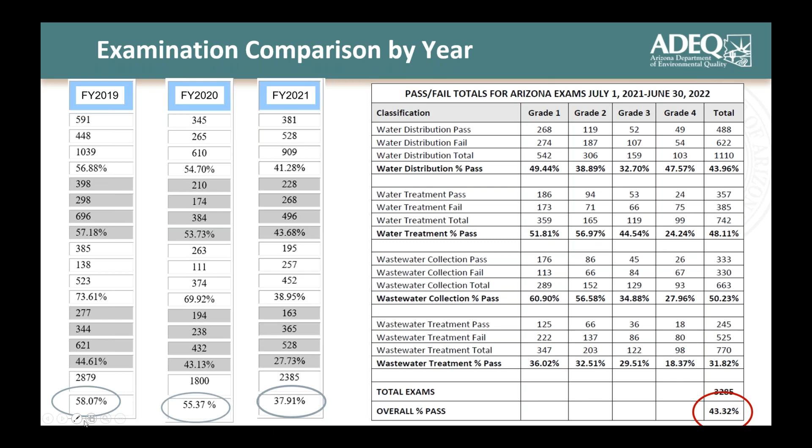Okay, so... computer's a little slow here. There we go.

This doesn't mean to apply for an early exam. Pretty much, the application provides a qualified applicant an opportunity to skip a grade they do not currently hold with ADEQ, and you can sit for the requested exams if you qualify. All applications are reviewed based on the conditions written in AAC Title 18, Chapter 5, Article 1.

Moving forward, if you hear me say R18-5, or you see this list in the presentation, just know I'm referring to this exact same rule.

In the future, if you are considering skipping a grade or going up to the next grade a bit early, we want to make sure you know your options, you know the process, and you're not going in blind. We have all this information listed on our homepage, the qualifications listed on our homepage. I pulled directly from the rule, but you can also read the rule itself on the bottom of the homepage.

There's a little bit of a typo on the homepage itself. For Grade 3, the second bullet should say 18 months of qualifying experience, not 1 year. So if I see anyone applying for a grade 3 and they fall under that, I always give them a call, let them know, hey, I see you saw the 1 year, but just so you know, the rule itself says 18 months.

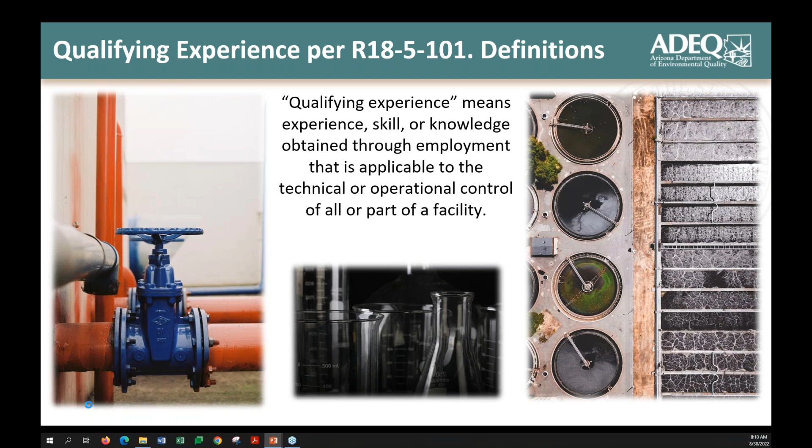Moving on to our next definition that we're going to be needing: qualifying discipline. Qualifying discipline means engineering, biology, chemistry, or closely related technical or scientific discipline. This is what your degree or your post-secondary education needs to convey for us. When you provide your transcripts, they can be unofficial, or you can also provide a diploma or picture of whatever your degree is in the STEM field. To expand on this definition, we also accept hydrology degrees, environmental science, microbiology, geology, physics. Just make sure it qualifies as a STEM degree.

For your transcripts, yes, your grades need to be a C or better. So if you don't have that, please I would hold off on applying for this, or give me a call and see what other options you have.

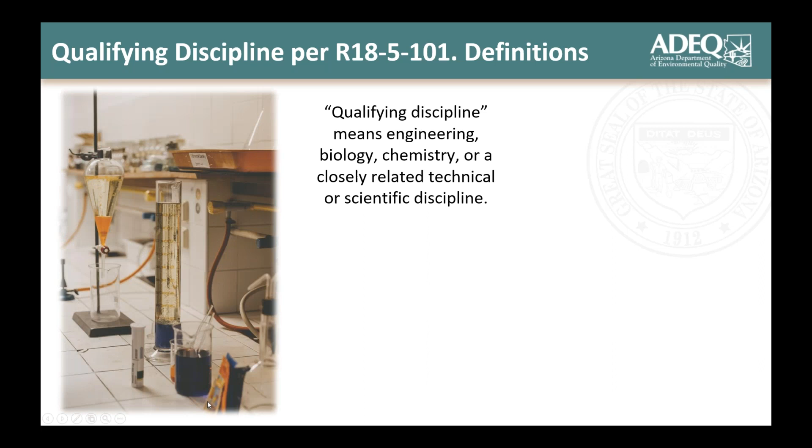This qualifying discipline will mainly fall under two subsections you'll see in a minute, while the third option is providing us a high school diploma or a GED. So we have like chemistry, we've got AutoCAD for engineers, or any system if you're familiar with the SCADA system, and then just general earth sciences — like I said, STEM degrees.

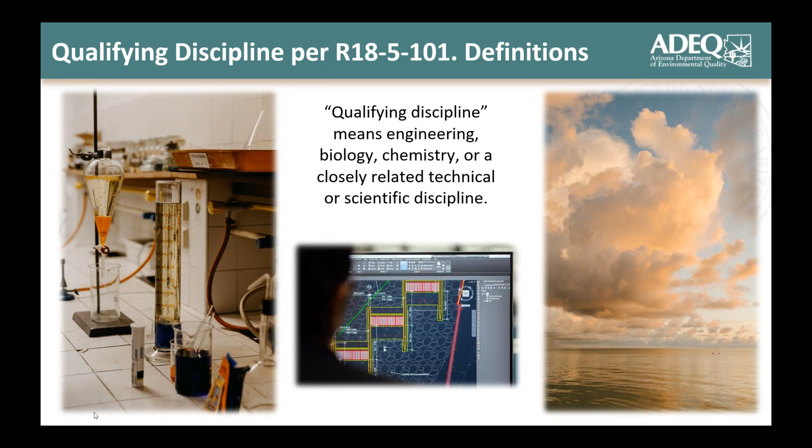So how does the qualifying experience definition and qualifying discipline definition fit into requirements per R18-5-112D specifically? Well, it's going to depend on what grade exactly you are applying for.

R18-5, section 112D eliminates the subjective decision making. We're very objective when we are reviewing your applications. Education experience must correspond with one of the three options — A, B, or C — for grade 2, grade 3, or grade 4.

I'm going to bring up some scenarios, but any person who's going for a grade 1, you don't need to apply for an early exam. Your minimum qualifications are just a high school diploma or equivalent, like a GED. Most applicants will fall under B or C. Those falling under A are typically bringing experience from another jurisdiction or have held this certification or grade in the past and it's no longer active. Okay, let's go through some scenarios.

Scenario 1: April is applying to sit for water treatment grade 2 early. Remember, we need that qualifying experience and the qualifying discipline in education. April has submitted an AA from Gateway Community College in environmental science and water resource technology, and she has been a water treatment grade 1 operator for 9 months. She could not qualify under A because she has not been a grade 1 for at least a year. But she does have an AA, and the degree itself is considered a qualifying discipline, and she's been an operator for at least 6 months. Under these circumstances, April's early exam application would be approved.

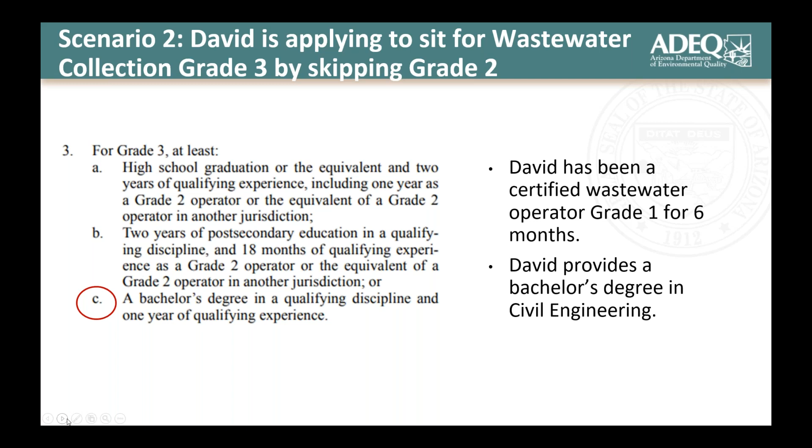Okay, and last scenario. You must get it at this point, so let's see if you can do this one along with me. If David is applying to sit for a wastewater collection grade 3 by skipping grade 2 completely, which he can do. Same scenario: he has a grade 1 for 6 months right now, and this time he's provided a bachelor's degree in civil engineering. Based off of his experience as a wastewater operator, he's only 6 months, but he has provided a bachelor's in a qualifying discipline. Unfortunately, once again, David would only fall under 3 subsection C, but his experience is missing 6 months, even though he does have the qualifying discipline. Unfortunately, once again, David would be denied the opportunity to sit early for the grade 3.

We would just recommend, hey, we recommend you sit for the grade 2. Apply again if you would like in the future, but we will talk about those options based on the certifications that he currently holds. Okay, so now that you understand how the process is, how we're reviewing your resume and transcripts for qualifying experience and education when you submit them, you're thinking in your head, okay, I know I would meet this criteria, so I'm ready to apply.

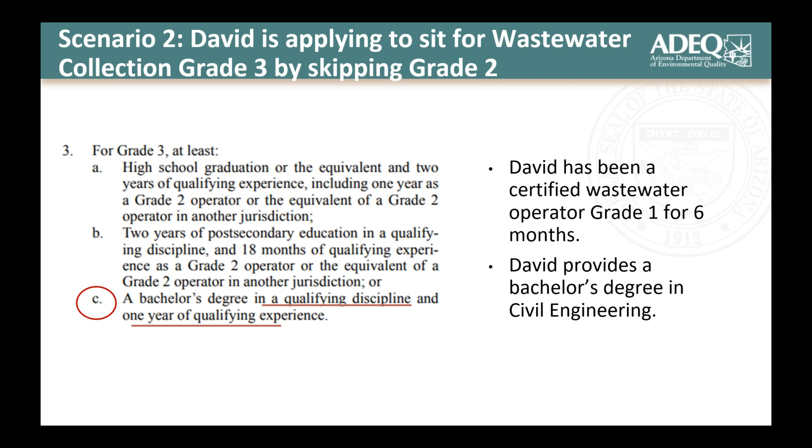Apply to test early. Please keep in mind the portal is only compatible with so many browsers, which would be Chrome, Firefox, and Safari for Mac. So to avoid any errors as you're going through your application, please ensure that you're using compatible browsers for the portal. Also, this is the operator certification portal, but moving forward, I will be referring to it as just the portal.

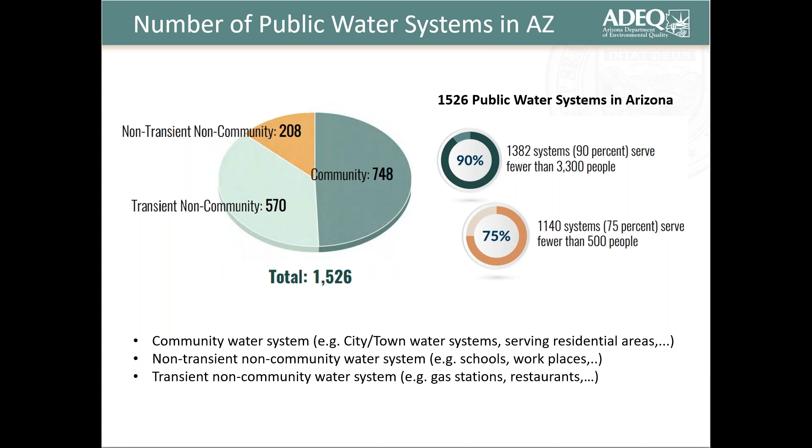Most of our systems are considered small or very small. Of the 1,526 water systems we regulate, about 90% serve less than 3,300 people, and 75% serve less than 500 people.

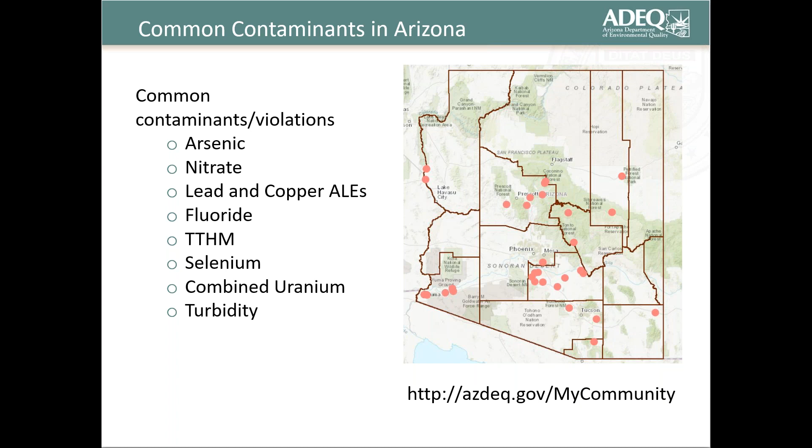The map here just shows you drinking water systems with a health-based exceedance. The most common contaminants we deal with are arsenic and nitrate exceedances for drinking water. We also see lead and copper action level exceedances, fluoride exceedances, disinfection byproducts, and so on.

Some common areas for non-compliance: the first is exceeding a health-based standard or an MCL, some caused by water system failures. We also see water systems failing to obtain required approvals from our engineering unit when constructing a new water system or making adjustments to an existing one. Anytime you make modifications to your existing water system, please let us know so we can tell you if you need approval from our engineering review unit.

Related to that, we also see the use of unapproved materials, coatings, and so on. In the field, we see issues caused by lack of preventative maintenance—leaky storage tanks and other O&M issues.

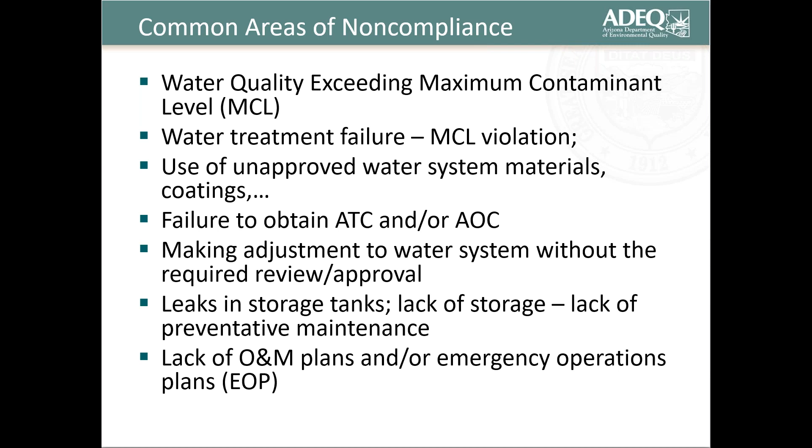In terms of paperwork, a common compliance issue is a lack of an operations and maintenance manual and a lack of an emergency operations plan. We believe most of these are tied to a lack of adequate TMF capacity—technical, managerial, and financial capacity—which brings me to our capacity development program.

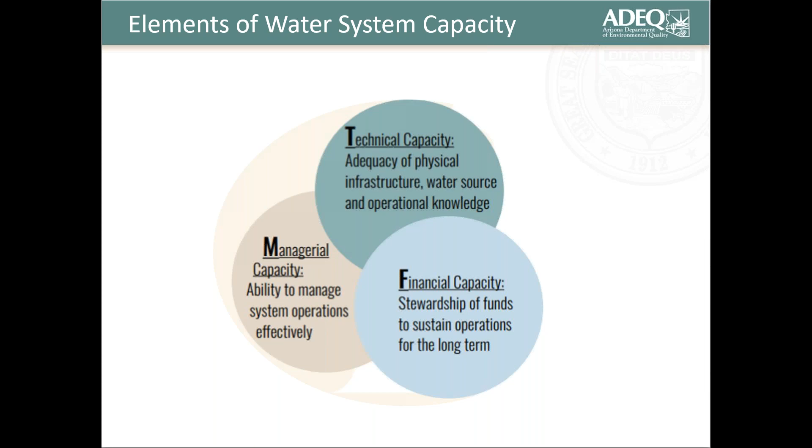Our capacity development program's goal is to strengthen the TMF capacity of public water systems so they're able to maintain compliance with all applicable state and federal regulations, and also possess long-term sustainability. Technical capacity is the physical and technical capabilities of your system—source water adequacy, infrastructure sufficiency, and the technical knowledge of your staff.

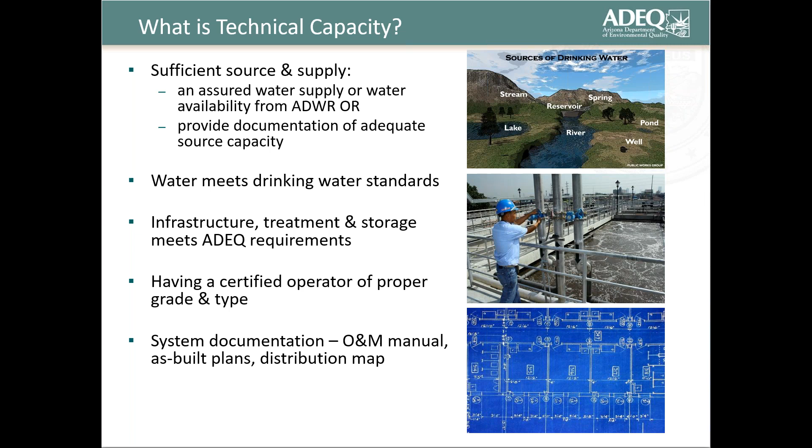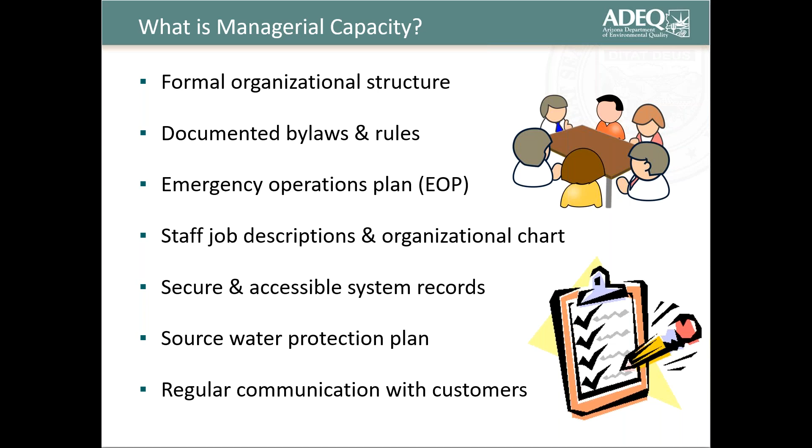Managerial capacity is the administrative and organizational structure of the system—ownership, accountability, staffing, corporate structure, which we touched upon a little, and communication. I'm simplifying these, so if you have any questions, feel free to add them to the chat.

Financial capacity would be the financial resources of the water system to maintain the system now and in the future—revenue sufficiency, are you bringing in enough revenue, credit worthiness, and what kind of fiscal controls do you have?

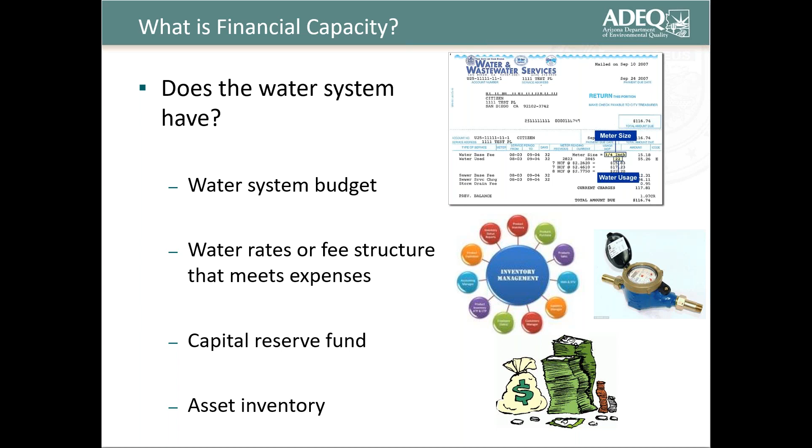So your annual budgets and so on.

So why is TMF capacity important? Like I mentioned before, it's so public water systems are able to meet current and future demand and also maintain compliance with all regulations, state and federal, long term. EPA also requires states to develop a capacity development strategy and programs to help public water systems strengthen their TMF capacity. We just revised our strategy in 2022. The strategy is basically programs, methods, and tools that ADEQ will implement so that new and existing water systems have adequate TMF capacity. We list out what kind of tools, programs, and projects we're taking on so we can help you guys maintain adequate capacity.

One of our goals for fiscal year 2022 was to evaluate the overall health of our public water systems. So to do that, we developed a TMF assessment tool, and the data we gather is going to help us understand the capacity needs within the state. We have conducted the assessment of 1,427 systems so far, so we only have less than 100 systems left. We're hoping to use that data to come up with projects that would be useful to public water systems.

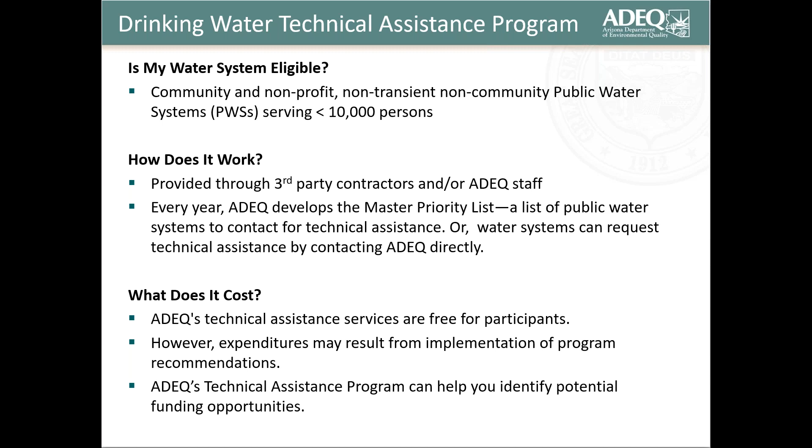To explain more about the type of technical assistance we provide, we can assist with system evaluation with recommendations for improvements. Usually it's one of our contractors that will come to your system, do a full-on evaluation to let you know where you have capacity gaps and provide you with recommendations to improve, and also some of the basic costs to do that. So you can use that to go to funders and so on.

Another type of technical assistance we provide is treatment selection and design. So if you're exceeding for a particular contaminant, we can help you select the type of treatment that would be optimal for your system and also help you design it. For systems that have treatment, we can assist with treatment optimization or operations optimization as well.

We assist with management and financial planning. This would include budget preparations, rate analysis if you need that, board training, asset management plans, and so on. That's under management and financial planning. We can also help you prepare permitting documentation, assistance with putting together an approval to construct and approval of construction.

We also assist systems with planning for consolidation or regionalization. Most of the time, the consolidation projects that we worked on are usually smaller systems that are dealing with some sort of contaminant or that have an MCL exceedance, and they don't have the capacity to maintain a water system. For example, it can be a school, so it's really not their main job. They want to consolidate with the nearest town or city, so we can assist with those type of projects as well. And like I mentioned before, we can assist with identifying and seeking funding for needed improvements.

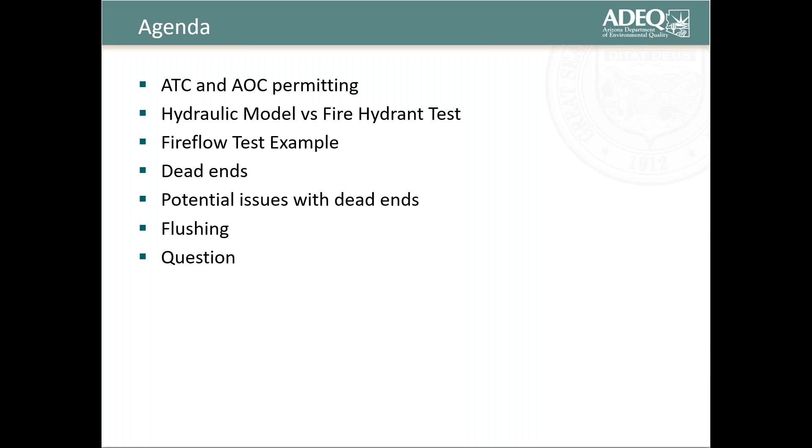So here's the agenda for my presentation, it's going to take about 25 minutes. First, I'm going to talk about what an ATC AOC permit is and how it's related to fire flow and flushing. Then we'll move over to talk a little bit about hydraulic model and a fire hydrant test. We'll go over a fire flow test example. Then we'll move on to talk about dead ends, potential issues with dead ends, flushing, and then we'll have about 5 minutes for questions.

Okay, so ATC stands for Approval to Construct. A public water system needs to submit an ATC application before constructing any water components. So the most common components are listed there: wells, storage tanks, booster pumps, water line, treatment plant, and chlorinators. So the ATC permit will allow the water system to construct these water components.

ADEQ usually does a review and will check to make sure that the proposed equipment is designed correctly. After construction and testing, the water system now will have to apply for an AOC, that's approval of construction permit. The AOC permit is for the water system to gain permission to operate that equipment.

Usually the ATC and AOC applications are submitted by a professional engineer that works for the water system or is hired by the water system. Usually we work with the engineers since they have to provide their PE stamp for the design report and construction drawings, but we definitely like operator participation and input since they know the system the best, and some of these engineers are just contractors, or they'll gain information just on a site visit or whatnot.

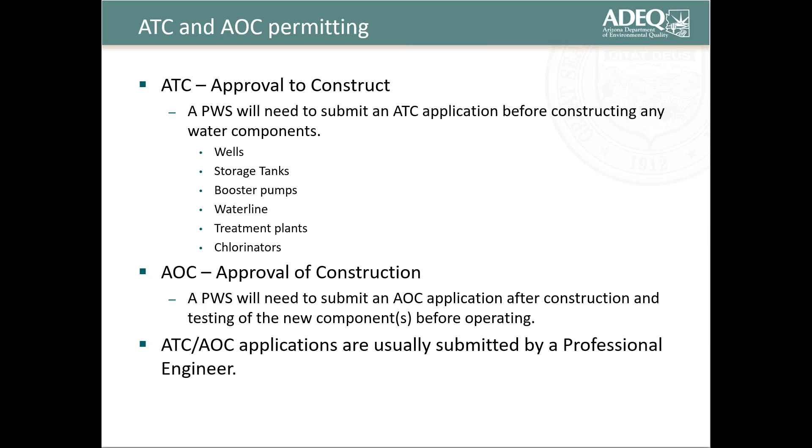So the reason why we're talking about permits is we run into fire flow issues with water line permits. So we do need an ATC permit for a new water line, whether that's an extension or modification or for a new subdivision. So I have up there that if the water line project costs more than $50,000, an ATC application is required.

The $50,000 limit is for an exemption. So if your project is a water line and it's under $50,000, you may be up for an exemption. We're not going to talk about that today, but if you have any questions on that, I can answer that at the end. So as part of the ATC application for a water line, the applicant will need to submit construction drawings stamped by a professional engineer, the review fee, and a design report stamped by a professional engineer.

And some details in the design report, it covers information on the summary of the water line project, any calculations that needs to go along with it. And the big one is justification to meet the minimum pressure of 20 PSI for all flow conditions. So for example, if we have a new subdivision going in, the design report will calculate how much water is going to be used in that subdivision and how the existing water system can meet that demand and pressure.

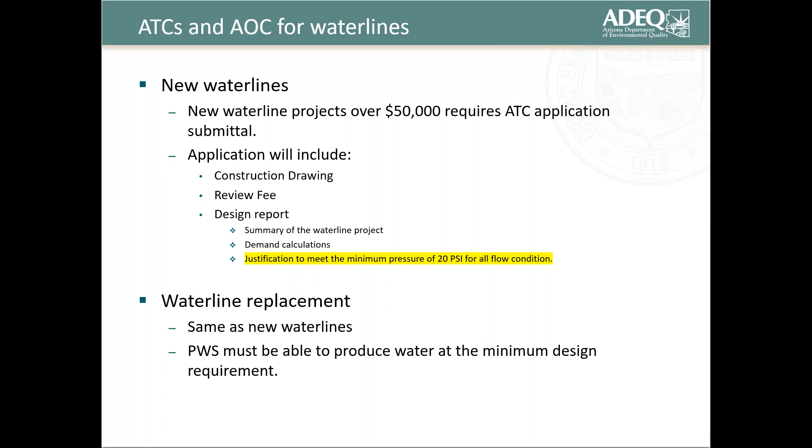Okay, so we're gonna jump over to hydraulic modeling and fire hydrant tests. These are two of the options to provide justification to show that your water system or new water line project can meet the minimum pressure of 20 psi for all flow conditions.

We like to see that the water system can demonstrate their worst case scenario, and that is usually fire flow plus max demand. So usually for a new subdivision, hydraulic modeling is the best option.

You'll see it in the design report. The engineering will develop a model to show the average flow, max flow, and fire flow, using existing flow data to conduct their model. This helps them design what size line is needed for the subdivision, how to loop the system if necessary, and what the pressures are going to be.

For example, if you're in a hilly area, the hydraulic model can determine if you need to put in pressure reducing valves, a new booster station, etc.

A fire hydrant test is commonly seen for water line replacement projects, especially if you're just replacing a small segment. Hydraulic modeling can be expensive, so you can use fire hydrant tests along with some calculations to show that you're able to meet the minimum pressure of 20 psi. Usually the hydraulic model will use a fire hydrant flow test in order to calibrate their model.

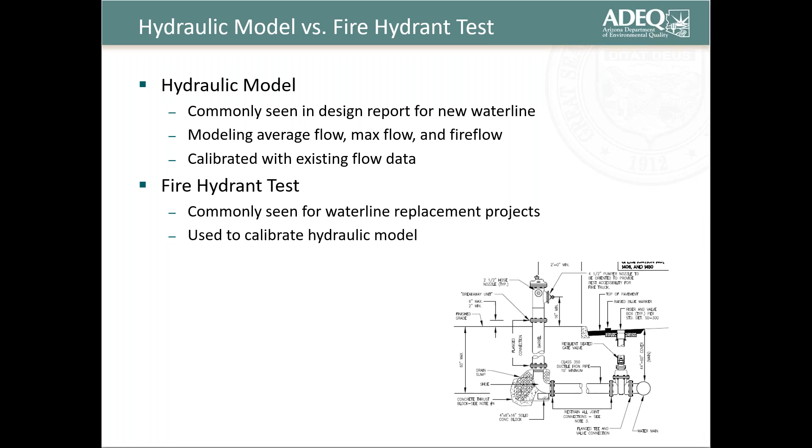So here is a kind of made up subdivision, pulled from one of our examples. We have this new subdivision here on the left, a proposed subdivision basically, and then this existing water line along this road. So C here is going to be our control fire hydrant, and then 1 here is going to be where we're testing the fire flow.

During a normal fire hydrant test, the operator, water system, or fire department will come out and run the fire hydrant. They'll measure the static pressure at the control hydrant, basically the pressure at which there's no flow, and record that. Then they'll run the fire hydrant downstream and measure the flow of this hydrant. They'll have someone on the other end measure the residual pressure, and from that we can calculate our worst case scenario.

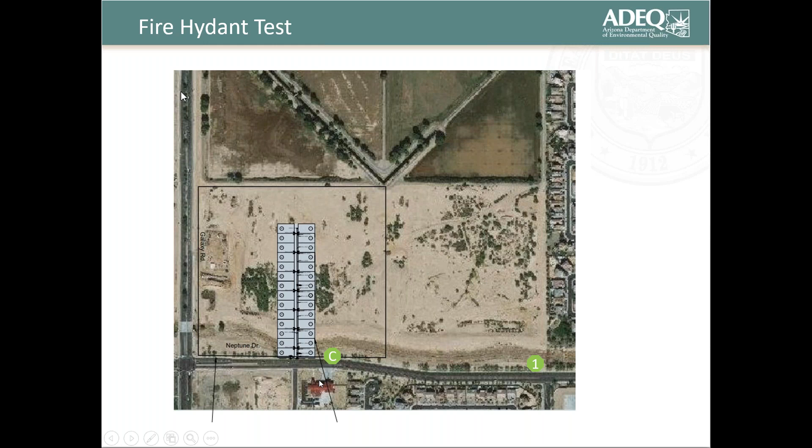Let me show you here. This is typically what it looks like for a fire flow analysis. If you look here at fire hydrant 1, that's what we're talking about, it has some information on the hydrant, and then here's the control hydrant.

First we'll look at the static pressure, what we talked about. Remember, this is when they pull the pressure without any demand. So our scenario here, we have a 73 psi pressure with no fire flow.

The next step is they're going to run that hydrant 1. That hydrant is producing 1,200 gallons a minute, and at the control hydrant, now we're getting a pressure of 66 psi. Of course the pressure is going to fall when you have a high flow. This made up system is designed really well, so the pressure didn't drop that much, but if your system is small or you don't have that much pressure, it could be a significant drop.

The last step of the hydrant test is a calculation. They extrapolate the pressure down to 20 psi to see how many gallons per minute can be produced if the pressure was reduced to 20 psi. In this case, you can pump up to 3,500 gallons a minute and still have a pressure over 20 psi.

Now, sometimes these cases are realistic, and sometimes they're just a calculation that gives you an estimate of how strong your system is. The reason we have this case is sometimes the fire department can hook up to the hydrant with their own pump in their fire truck. So if they know the system is well pressurized and they need extra water, they can pull more water from the system instead of just getting what naturally flows. But 99% of the time, this isn't going to happen.

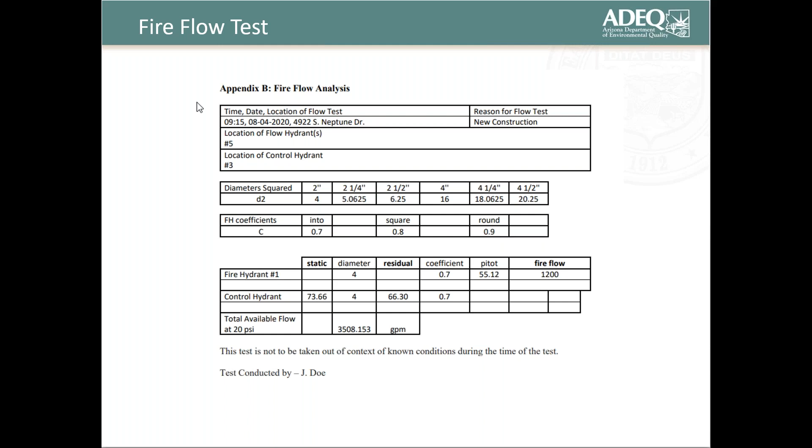Any questions on that? I know it's kind of covered a lot right there. No questions so far. All right, thank you.

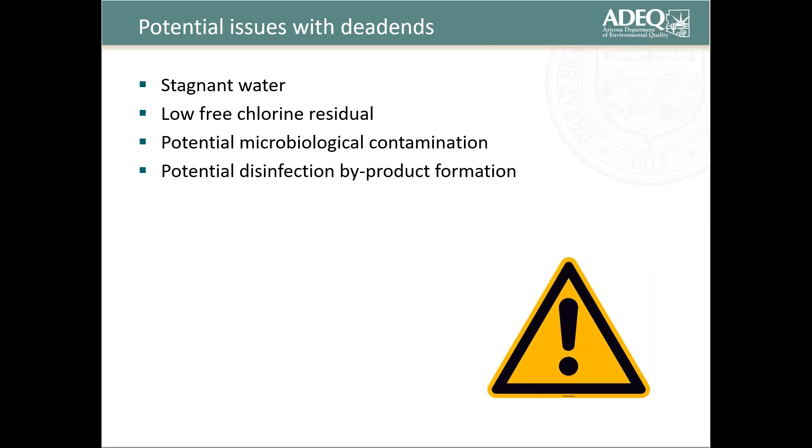It's not required, there's not a requirement for not designing it like this. We just ask you to show us the preventative, proactive measures on how not to have stagnant water. But then it's up to the water system to properly design their system. In some scenarios you don't have land or the financials to loop the system, so we'll work with you to mitigate the issue as much as possible.

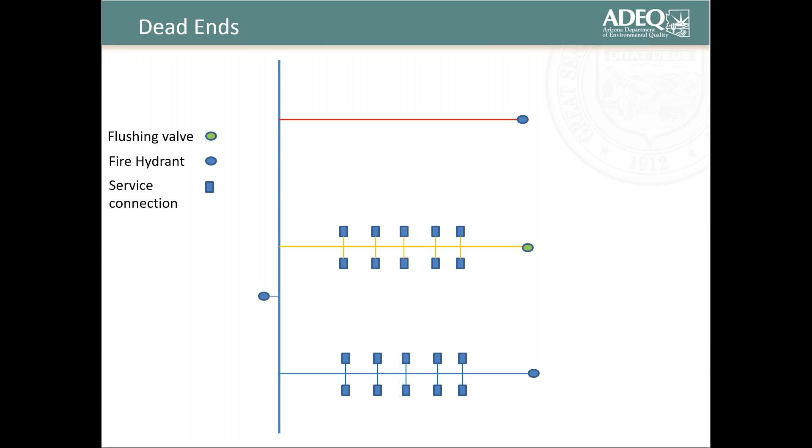A lot of this has to do with the engineers and water system, but operators are the ones out there. They know how the system works, so we definitely love their input to get more realistic information rather than just calculations and models. So, all right, that's all I have.

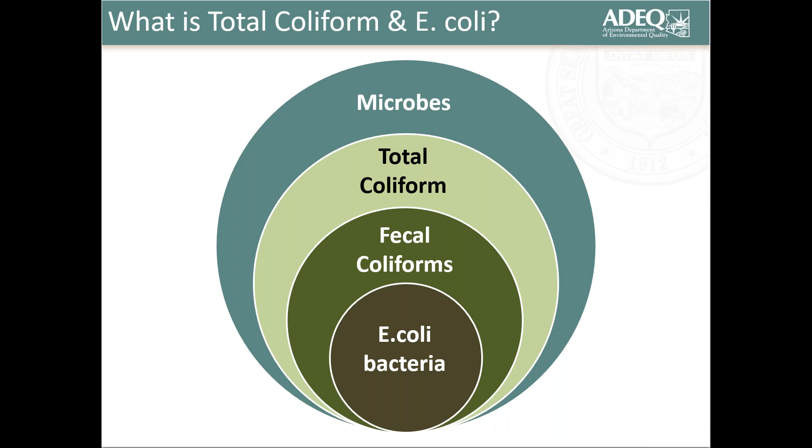So, some terminology. You turn in your samples to the lab, you request some BACT results. We use TC positive as an acronym for total coliform positive, meaning that it is present. TC negative means total coliform is negative, meaning there are no total coliforms in that sample. Then you have E. coli positive, obviously present, and E. coli negative, absent. So in a perfect day, we want to see negatives and negatives across the board.

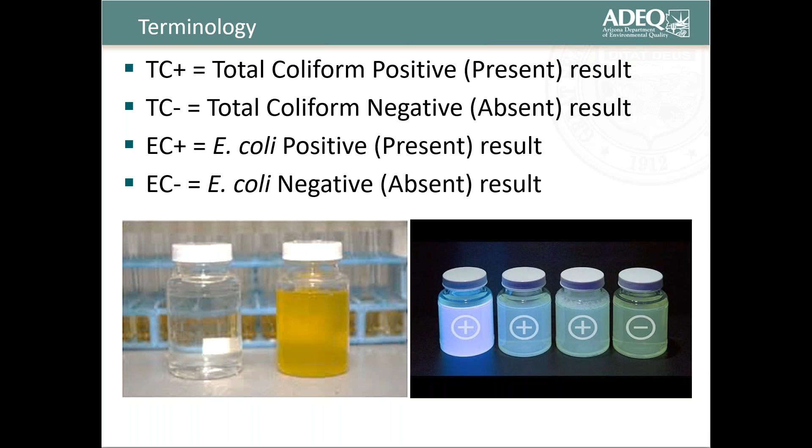So I have a couple of frequently asked questions that we get, and I'm going to walk us through them. One of the first ones we often get is, when are my BACT results due?

Like most of the samples that you send in for analysis, they're all due - the data need to be received on the 10th day after the monitoring period ends. All your samples need to come from your MSSP. It has to be pre-approved by your regulating agency, whether it's ADEQ or Maricopa, or if you just fall under the ADEQ umbrella.

If you want it to count for compliance, you can't just go take your BACT samples from any sample tap. It has to be specifically written out in your MSSP and approved prior to taking the sample. So if you have an MSSP that is out of date, or you want to add some additional sites to it, now is the perfect time to update that and get it sent over to your regulating agency.

So we said the 10th day after the monitoring period ends - any data received after this date will be considered late data, and the system will be given a reporting violation. I want you to keep this in mind. We'll revisit this idea a little bit later, but ultimately it's up to the water system to get that result to your regulating agency in that time.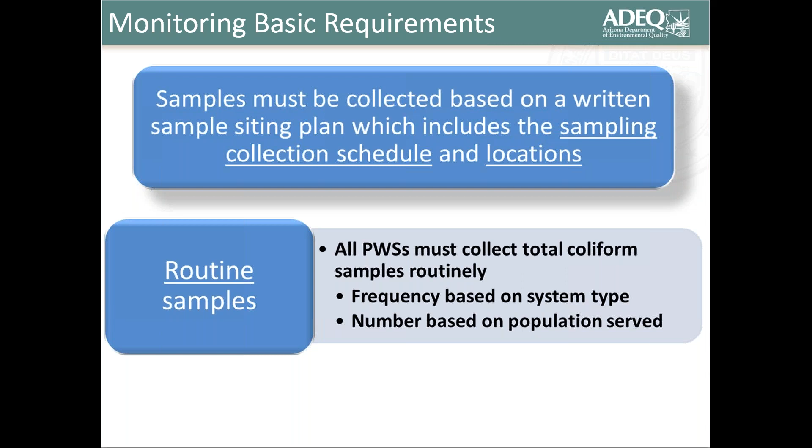Total coliform positive and E. coli positive results are due within 24 hours of notification of the results from the lab. Again, we'll discuss that a little bit more in detail in a second.

So I am a water system, I have a total coliform or maybe an E. coli positive. What do I do? Well first, you want to make sure you contact your delegated regulatory agency, and you want to do this by the end of the day. If this is after business hours that you received this, please leave a voicemail, send an email, do both of them, and then follow up the very next business day with us. It is imperative that this information is conveyed to the regulatory agency in a very timely fashion.

Again, we talked about this earlier with E. coli - this is something that can get somebody sick very, very quickly, and this can be life-threatening. So it's imperative that this be done in a very timely manner.

What do you do next? Well, take your repeats. So you have a positive, you have sent in your MSSP, you have it approved. Take your repeat samples - they're always going to be upstream, downstream, and the original location that your sample came back positive. And then you need to take any raw water samples at any of the wells that were active and contributing to the finished water at the time of this positive result.

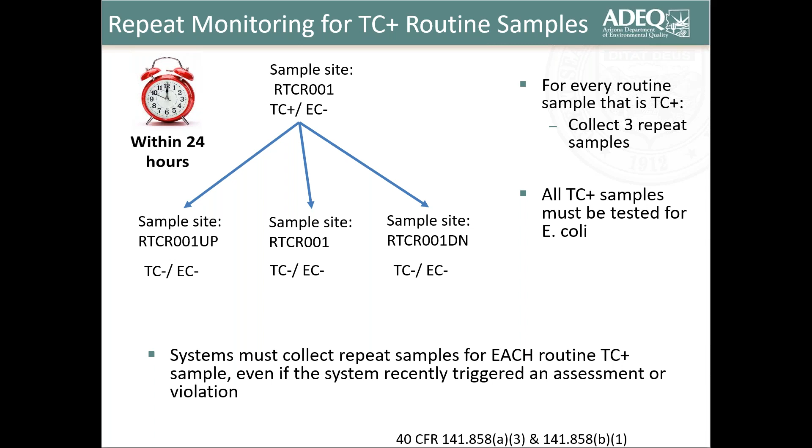So after you got your results off of your repeats, you took your groundwater samples, the next step is that you need to determine if you actually triggered a boil water advisory, if you triggered an assessment, or if you get an all clear.

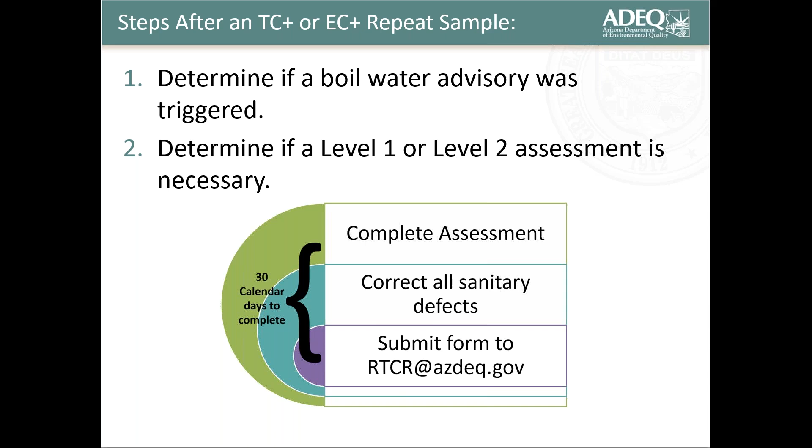Assessments are due 30 calendar days from the second that you are notified of the repeat sample positives.

I said we'd revisit this. This is a question that we often get: is it 24 hours from when the lab calls or emails the notification to the public water system, or is it 24 hours from when the public water system hears the voicemail or opens their email, so when they view it?

This is a very interesting question. To answer this bluntly, it's 24 hours from the lab notification. So you need to take your repeat and any of the groundwater samples within 24 hours of the notification from the lab about the total coliform positive or E. coli positive.

Some people ask, well, how does ADEQ or the agency know when the lab notified me? Well, on the DWAR form, there is a space that the lab is required to fill out in the event that they get a total coliform positive or an E. coli positive. I'll talk a little more about how you can avoid checking your emails and voicemails over the weekends or holidays, but the lab does display exactly when the water system was notified, and that's when the clock starts.

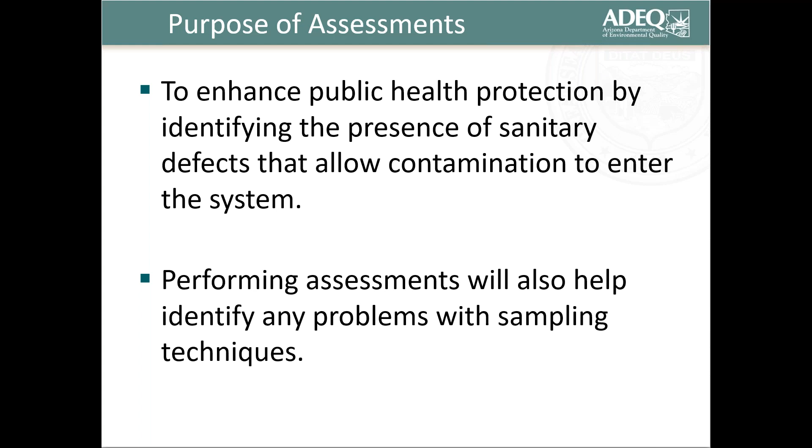So what is it that triggers a level 1 assessment? For very small systems, which is a majority of the systems in the state, if you take less than 40 routine samples per month and you get more than one total coliform positive—so that would be your total coliform positive and then your repeat—that triggers it. For much larger systems, if you take 40 or more samples per month, the threshold is 5% of the total samples have to be total coliform positive in order to trigger an assessment.

You can also trigger an assessment if the system does not take all of the required repeats. This includes your groundwater or any of your upstream, downstream samples. If you take them at the wrong location, they're not included on your MSSP. And finally, if you don't take your repeats within 24 hours of the lab notification—remember, we've got to take our repeats within 24 hours—if you don't do that, it automatically triggers a level 1 assessment.

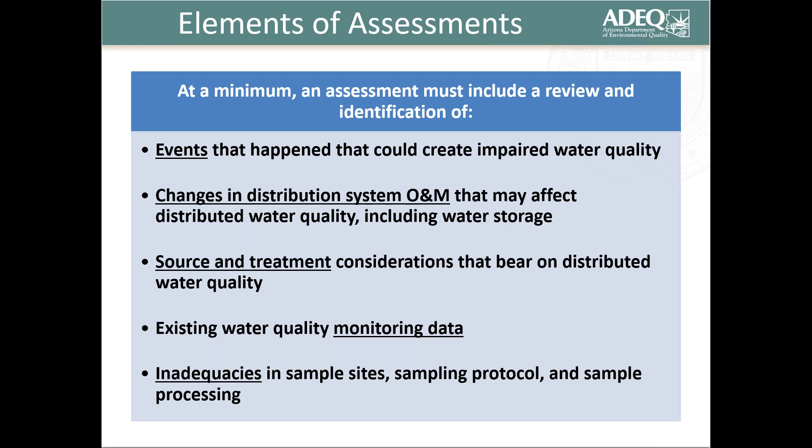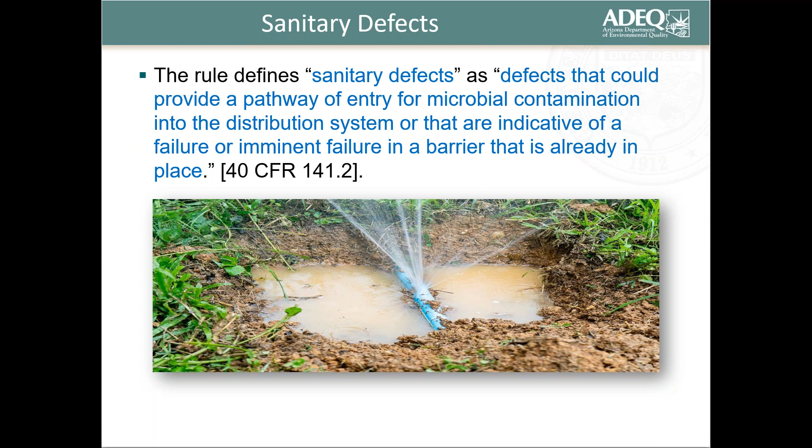So I have some examples of sanitary defects. Sanitary defects can vary, but some examples are storage issues, like plant or animal activity, improper sealing of your storage tanks. This is a good picture showing a leaky storage tank that has plant organic matter growing out of the side of it, and that is just a pathway for contamination to get into the system for finished water.

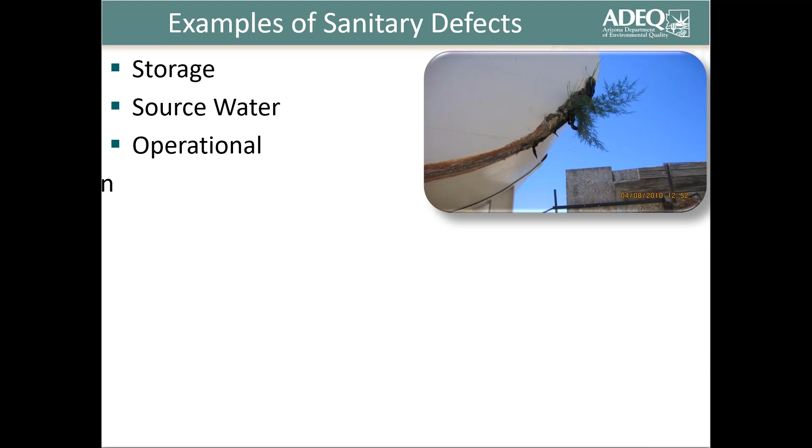Other things that could be sanitary defects - you could have operational issues, maybe an untrained sampler. Some of us know how simple it is to contaminate a BACT sample if you aren't extremely careful, taking that sample and following the protocol to a T. Another thing is failure to follow your sample siting plan. The system could also be doing inadequate disinfection practices.

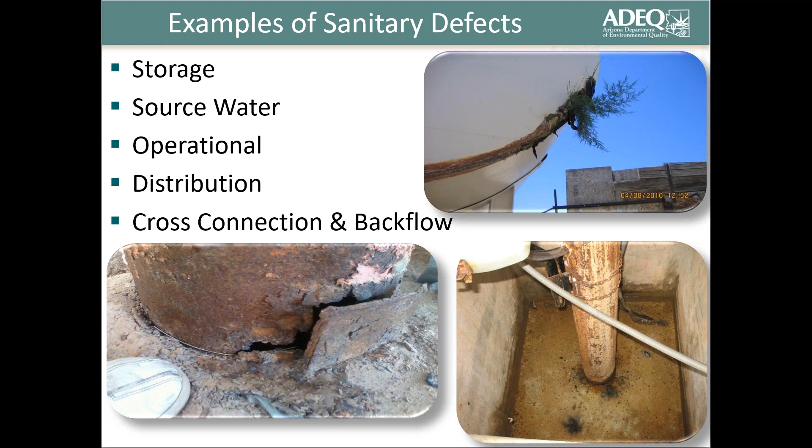So what steps need to be taken during a boil water situation? Nobody ever wants to be in this situation. It's always kind of a chip on our shoulder if we have to put out a boil water advisory.

It's not something that any of us really want to go through, but it's important. This is a very high priority because people can get sick and ill very, very rapidly. So it's best to be prepared and understand what results can actually trigger a boil water advisory and what you need to do in that event.

So we'll go through that. It's kind of a pop quiz. Obviously, I can't hear anybody, but I'll give you a second to think about this. Which of these three results would trigger a boil water advisory?

Is it A? If you have a routine sample that is total coliform positive and E. coli negative, and one of the repeats are total coliform positive and E. coli negative, does that trigger a boil water advisory? If you have a routine sample that is total coliform positive, E. coli negative, and one of the repeats are actually missing from the set, does that mean you have to do a boil water advisory?

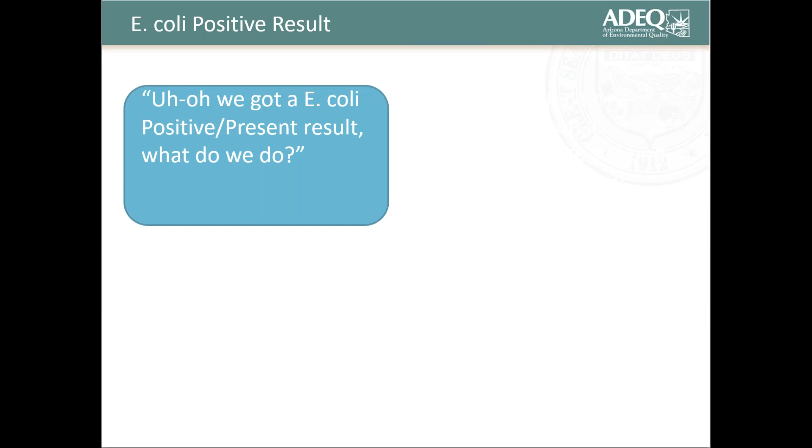So, I have triggered, I've got an E. coli positive. It's positive, it's present, it's there in my results. So what do I do next?

So you determine that the system has triggered your boil water advisory. Call us, call your delegated agency, call your compliance assistance coordinator. Like I said before, email them, call them. If they don't answer, leave a voicemail. If you don't hear from them, call them back the next business day. This needs to occur by the end of the day, even if it's on a weekend or a holiday.

But we all know how to avoid those now, so we're not going to be doing those. But again, if we don't pick up, leave the voicemail. The big takeaway message from this is act now. Don't wait. This is an acute contaminant. Remember, people can get sick very, very rapidly with this, so we cannot wait. This needs to be done as soon as humanly possible.

So Tier 1 public notice is required. You'll need to fill out a Tier 1 public notice and distribute it within 24 hours of notification from your results from the lab. We can provide you with the template for your boil water advisory, but be sure to get ADEQ or your delegated agency's approval of your public notice before distribution. Our approval time is cut pretty short, we're trying to get these back to you within 2 hours. That's our goal, but we want to see it before it gets distributed.

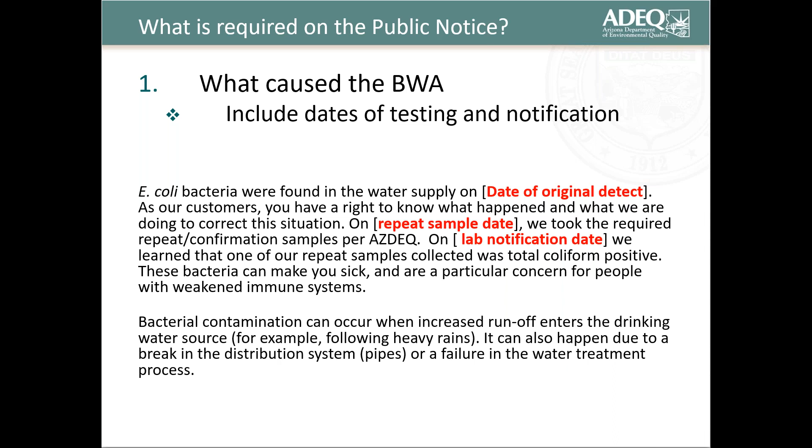So there's a couple of things required in the public notice. There's mandatory language which has to be present. Don't worry, I'm not going to read this slide to you, but you will need to include the things in red, like what caused the boil water advisory, what are the significant dates, like the date of the routine or the repeat sample, the date of the lab notification. These are all important things that have to be included in the boil water advisory.

There's more mandatory language. What should the customers do? They need to know if there's going to be an alternative source of water provided by the system. Is bottled water going to be available?

This is information that needs to be conveyed to the customers. You need to specifically say what fecal coliforms are, where they are found, what risks are associated with drinking contaminated water, and what symptoms could be present if the water is consumed. Those are the things, those wonderful descriptions that I gave at the beginning of the presentation.

You also need to include the corrective action. What's the corrective action that the system is actually taking, and how long is it estimated to take? What are you guys doing? Disinfection? Is there a repair that needs to occur? Maybe there's a, et cetera, et cetera.

But please try to be as specific as possible, especially with the dates and the time frames. If you can, be down to the minute, by Wednesday at 5 p.m. we plan to have this resolved.

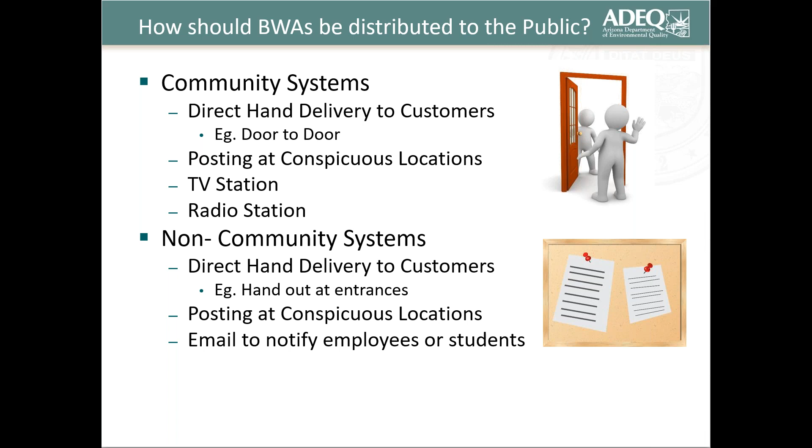So once the public notice or the boil water advisory has been distributed, you'll need to submit the final version to us along with a completed certificate of public notice distribution. Then start your level 2 assessment to identify any issues, like a cracked well casing, or animal feces in the well or the well house, or backflow issues. Just remember that the level 2 assessment must be performed by an operator of the same grade or higher as the public water system.

Make sure that ADEQ or your delegated agency has all the necessary DWAR forms for your routine repeat groundwater samples. If you don't have an MSSP, make one, and submit one with your assessment. If you have one but need to make changes, do so at that time. You can contact your compliance assistance coordinator for approval.

Perform any of the necessary corrective actions, like fixing a leaky tank or disinfecting a well house, and then let your regulatory agency know what's going on. Open lines of communication, please. All of the CACs, all the compliance assistance coordinators, are here to help and answer any questions that you might have. At the end of this presentation, I'll give you a list of the most updated assignments.

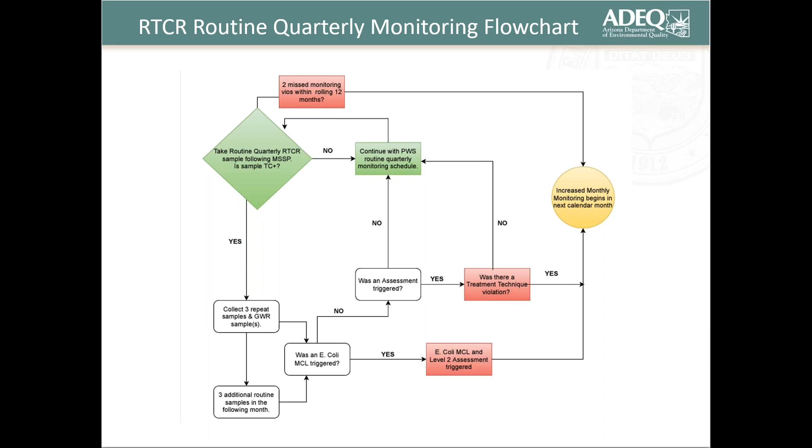All right, so I got a pop quiz, last question. True or false? A routine sample is total coliform positive, E. coli negative, and one of the repeats is total coliform positive and E. coli negative. This system is on quarterly monitoring, so that means this system will have to return to monthly monitoring the following month. Is that true or false?

Well, it's false. Remember, the things that can push the system back on monthly monitoring are: a Level 2 assessment is triggered, an E. coli violation, an RTCR treatment technique violation, a missed late assessment, a missed late seasonal startup form, or 2 RTCR mismonitoring violations in a rolling 12-month period.

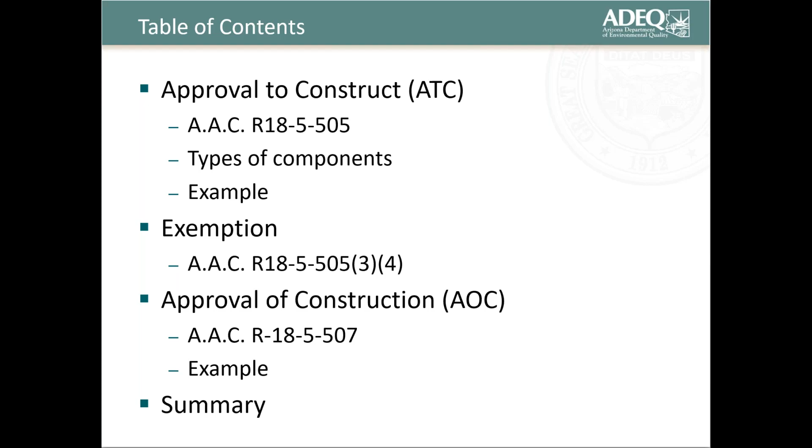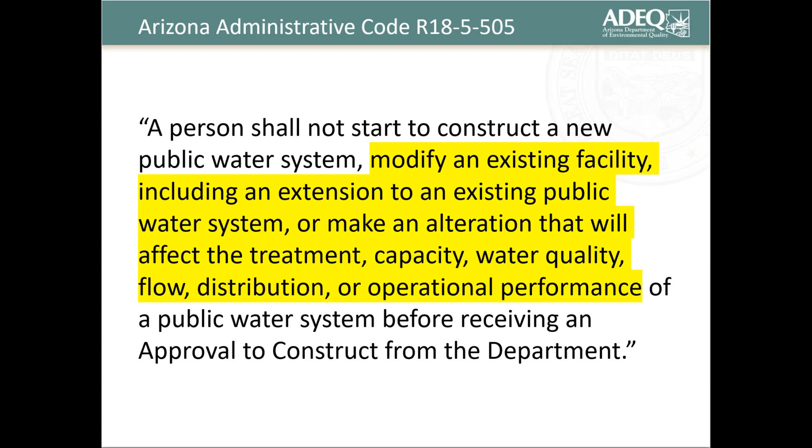Continuing on with R18-5-505, a complete ATC application includes the completed ATC application, the design report, and analysis of a proposed new source of water - this is specific to the type of water component, most likely a well - and then other pertinent data required to issue the approval to construct.

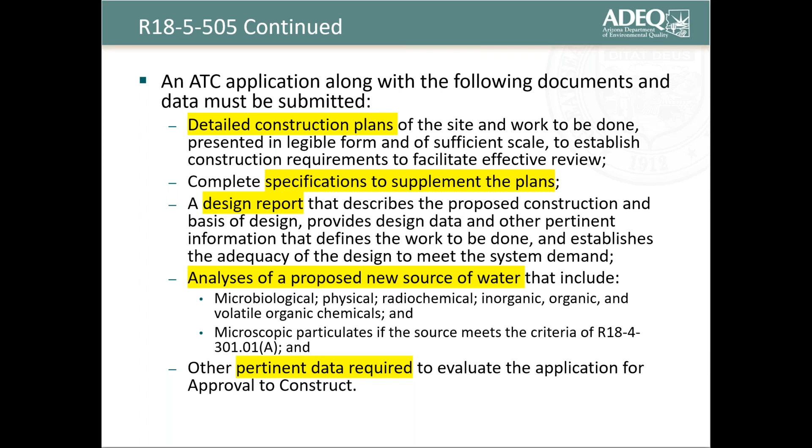So furthermore, proper verification of the document should be provided. The ATC application only requires the applicant and applicant's agent signature, which is usually the consultant or engineer. The construction plans and design report require the professional engineer's seal and signature on the cover page. The seal must include the signature and date signed, and the seal must be on each sheet of the construction plans.

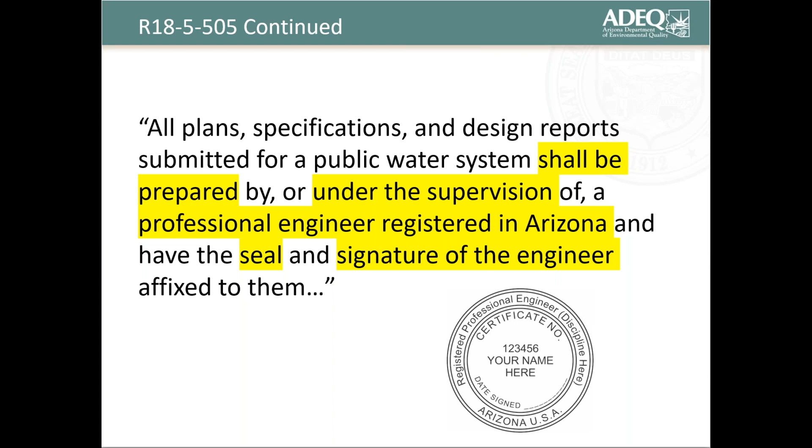So basically, to sum up the needed documents: the primary documents needed are a complete ATC application, the design report, the construction plans stamped by a professional engineer, and the review fee. The review fee varies based on the component type, but when an ATC application is submitted, we double check to make sure the appropriate fee is calculated before sending an invoice. There is a section in the ATC application to get an estimate of the total review fee, but we make sure to double check so we're not overcharging or undercharging an application.

So a water service agreement is needed for construction of subdivisions. This form is an agreement between the consultant and the public water system to allow use of water. However, this does not only apply to subdivisions, it also applies to other water components. So ADEQ requires some form of a letter from the public water system, but if the public water system is the applicant, then the water service agreement is not needed.

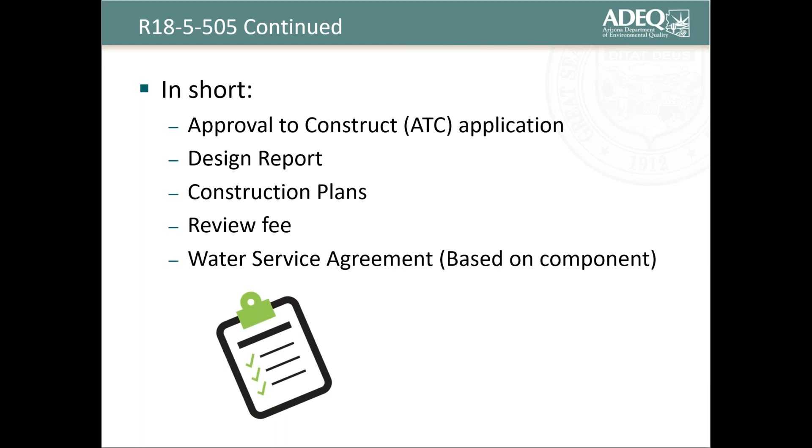So now we'll go over the different types of water facilities that need an ATC permit.

So these are the facilities that require an ATC permit: the water line, well, storage tank, water treatment such as chlorinators, blending, UV, GAC, booster pumps, and hydropneumatic tanks or pressure tanks.

Each facility is reviewed according to the type of function it serves in the public water system. As an engineer reviewer, we follow the guidelines and rules set forth in Engineering Bulletin number 8 and 10, the Arizona Administrative Code, the American Water Works Association, and local standards set by the county.

Next we'll jump into what is needed for each water component to obtain an ATC permit. Here are the documents needed for a waterline ATC approval. As always, we'll need that ATC application.

Specific to the waterline approval, there's a section 8C that needs to be completely filled out that has all the flow, demands, and pressure for that project. Then the design report, so the hydraulic analysis or the model, the calibration method, the construction plan, and the water service agreement, which must be filled out if the applicant is not the public water system owner.

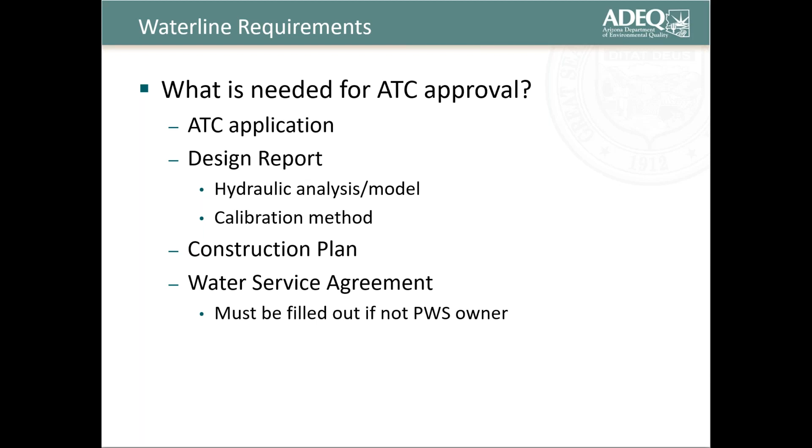So for well requirements, these are the items that are needed: of course the ATC application, and then in the design report for a well, the pump curve, then the construction plan, we need the plan and profile view of the wellhead, and then a new source analysis.

It must be completely filled out and signed by the laboratory. There is an option on the ATC application to submit it with the ATC, or you can submit it with the AOC.

Now, the only potential risk that we'll run into if you decide on submitting that new source analysis with the AOC is that the water source is unknown, so there might be potential for MCLs, and then we'll have to halt that well ATC and make sure that we address that MCL and get the appropriate treatment.

Some common deficiencies that we find in well reviews are missing analysis of the pump curve, missing that plan or profile view of the wellhead, or missing component details such as shut-off valves, pressure release valves. The new source analysis is incomplete or more than a year old, so that will require resampling for total coliform, nitrite, and nitrate.

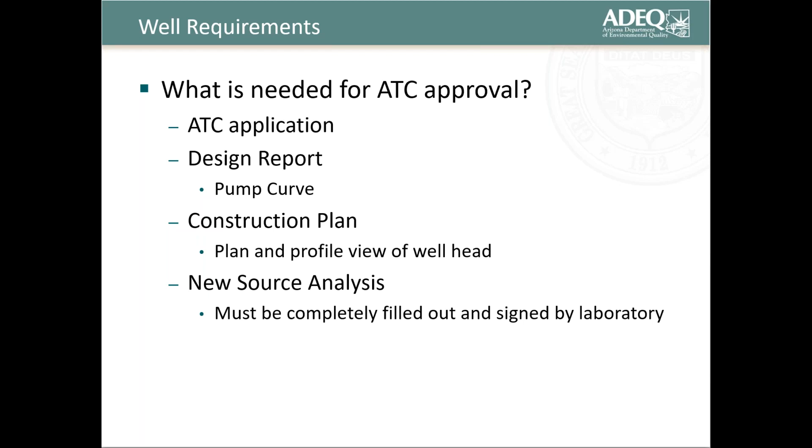And for the storage tank ATC approval, again, the ATC application, and there is a section specific for each component. The design report, we look for the storage capacity calculations and the specifications of the tank. And then on the construction plan, of course, the plan and profile view with all the details related to the storage tank.

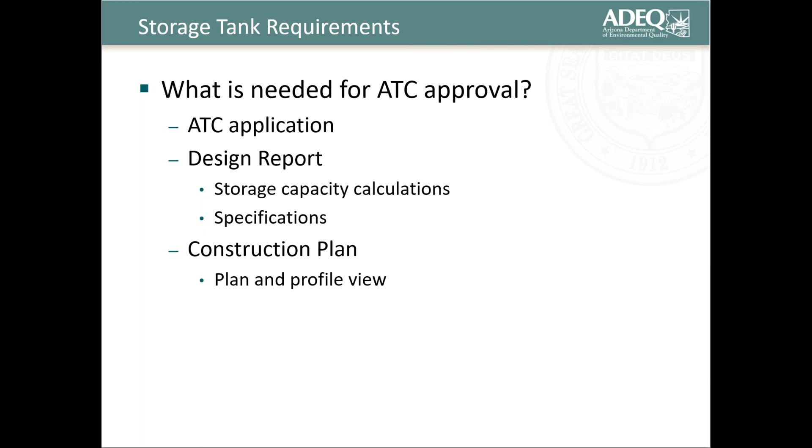Common deficiencies for the storage tanks are missing specifications, so missing the tank details and dimensions, missing the plan or profile view, along with some components that aren't always recorded on the construction plan, such as the overflow drain, sampling tap at the discharge of the storage tank.

Now, going on to the water treatment ATC requirements, again, the ATC application, and there is a specific section for treatment. It is important to note that each treatment type may require more data or information than others, so usually the more documentation and details, the better.

So for the design report, we look for the specifications of the treatment/disinfection component, the water quality analysis, and then again on construction plan, as much detail that can be provided, the better, so the plan and profile view of the treatment.

Common deficiencies that we find in treatment review is just missing those specifications of the treatment type, no water quality analysis before and after treatment installation. We like to see that just to make sure that it's being designed appropriately.

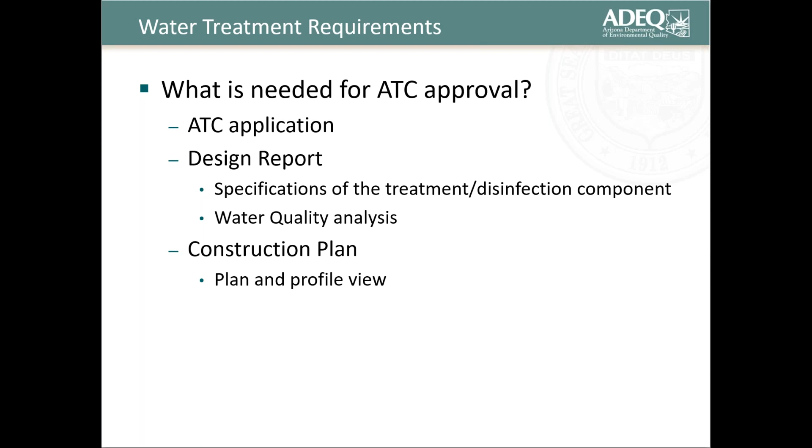And for booster pumps and hydro tank requirements, again, ATC application needs to be completely filled out. The design report, we look for the pump curve of the booster pump and the specifications. And in construction plans, we look for that plan and profile view.

So common deficiencies for booster pumps and hydro tanks are the incorrect payment. So we charge per unit, not per component, so if there's 2 booster pumps, we'll charge for each booster pump for the review. And other deficiencies are missing specifications and missing the pump curve, which is usually provided by the manufacturer.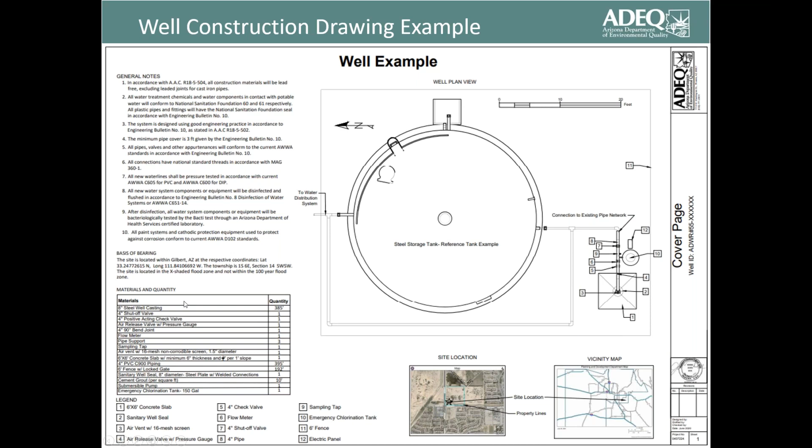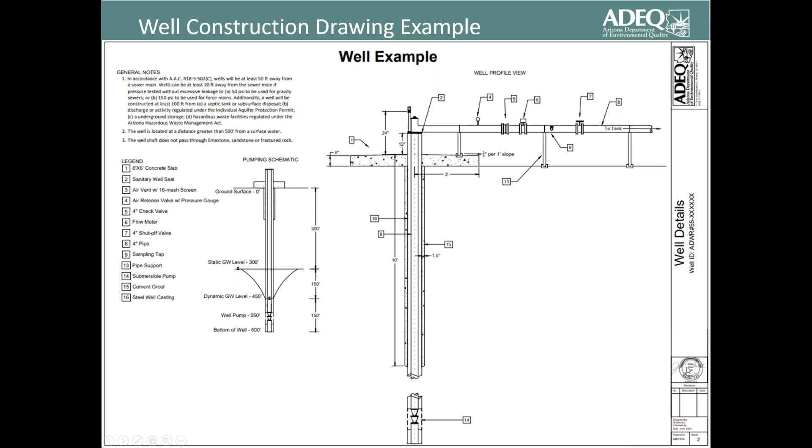And then here we have the well profile view, so we can get a view of the profile of the wellhead. As I mentioned, note number 4 is the air release valve that we always check for, and note number 5 is the check valve that is located there. Including as much detail as possible is always important, and you can include general notes as well. Then there's the pumping schematic for the wellhead, and the professional engineer's seal and signature.

Moving on to our engineering review unit goal. Per the Arizona Administrative Code, the review is under a licensing time frame that measures the total time to complete a review of an application. The internal goal is 15 days to complete the review, and this is usually met when there are no deficiencies on the application.

When there are deficiencies on the application, a deficiency letter is sent to the owner and engineer with an explanation of the items that will need to be corrected for approval. The deficiency letter is sent with a deadline set based on the amount of deficiencies found and complexity of the project. For example, a really common deficiency for a waterline project is Section 8C on the ATC application not being completely filled out.

If that's the only deficiency for a project, we're not going to give a 30-day time frame to correct that deficiency. We'll give usually a 10 or 15-day deficiency deadline, which is an appropriate amount of time to complete that deficiency.

Now, if that waterline project that was submitted is missing a calibration method, if it's missing the hydraulic analysis, or if there's no materials and quantities list on the construction plans, something that's going to require more time to correct, then that's when we'll give a 30-day deficiency timeline to correct those. So the amount of days given to complete the deficiency correction is typically 15 or 30 days, and sometimes it may be less or more.

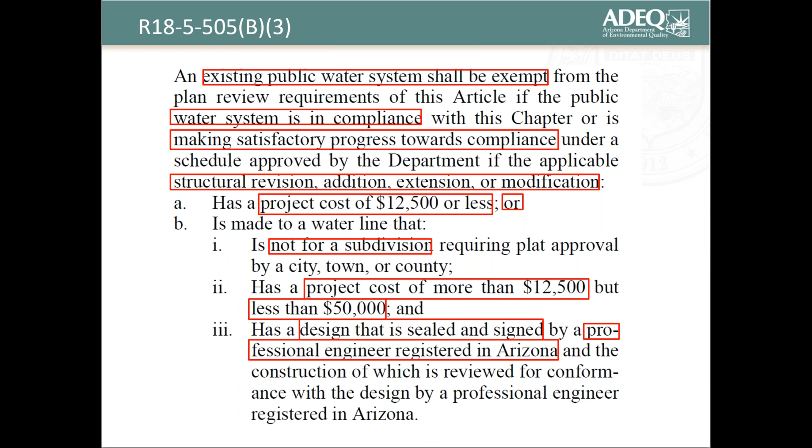Per the Arizona Administrative Code R18-5-505B3, the rule states that a project can be exempt from plan review as long as it is in compliance, and the structural revision, addition, extension, or modification has a project cost under $12,500, or is a water line that is not for subdivision and has a project cost of more than $12,500 but less than $50,000, and has a design that is sealed and signed by a PE registered in Arizona.

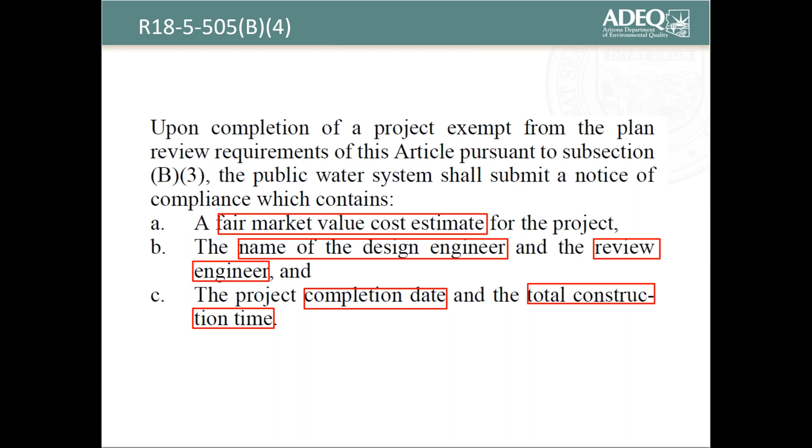And per R18-5-505B4, upon completion of a project for exemption, the public water system must submit a fair market value cost estimate of the project that includes receipts, invoices, the name of the design and review engineer, and the project completion date and total construction time. This pretty much sums up the Arizona Administrative Code rules for exemptions, and we'll go more into detail of what is expected for the ADEQ exemption process.

So first, let's look at the qualifications for exemption. You must be an existing public water system, must be in compliance with the Safe Drinking Water Act, or making progress towards compliance. This does not include a public water system with MCL violations, missed monitoring, or open cases.

The water line must not be for a subdivision, and projects cannot be split to meet the exemption requirements. Meeting these qualifications does not always guarantee exemption from plan review, but these are the basic requirements that allow for the opportunity to be exempt from the ATC/AOC process.

So before moving on, the exemption process can be viewed in two parts: the first as pre-exemption, and the second as post-exemption. Per the Arizona Corporation Commission, a pre-approval is required before going through exemption review. This phase, which we call pre-exemption, is not required by rule, but can be utilized to determine if the project will meet requirements.

As seen, limited information is needed for pre-exemption approval. Upon approval, a pre-exemption letter will be sent authorizing the public water system to move forth with the exemption process. All that is needed for a pre-exemption review is the project description, the location, the date of the project, and an estimated cost of materials, labor, and equipment. Then send your exemption request over to our group email.

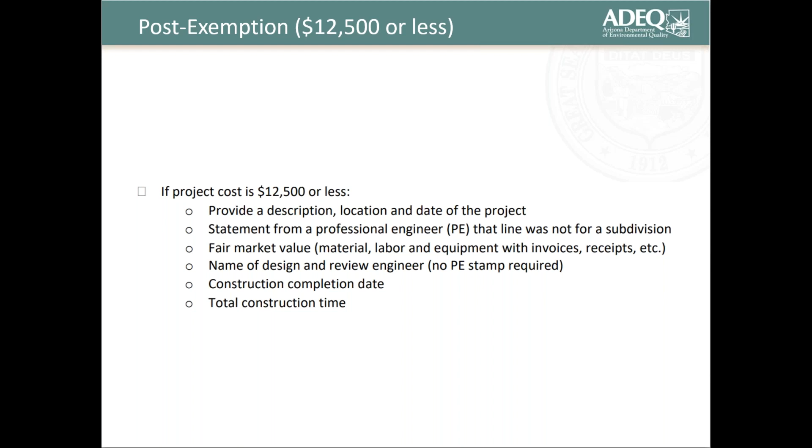After meeting the requirements for post-exemption, we will issue a post-exemption letter stating that the project has been exempt from plan review and met the requirements set forth by the Arizona Administrative Code.

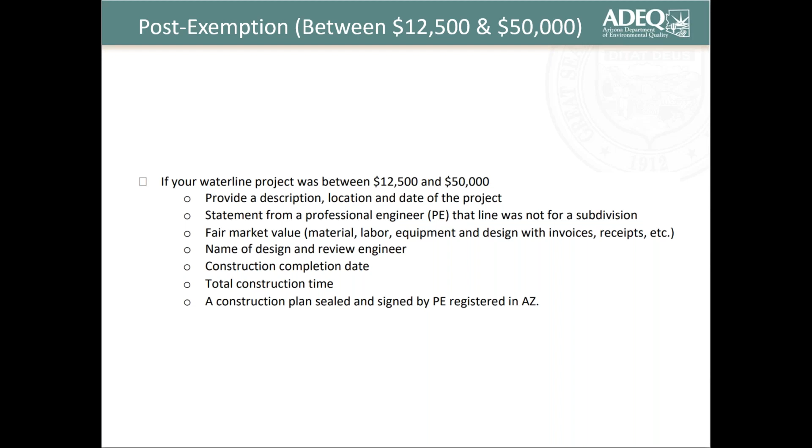So we took a slight detour from the ATC and AOC process, but we're back on track now. We'll go over the approval of construction phase, which is done after the ATC permit has been issued and the project has been constructed. This is the second and final phase of the ATC and AOC process.

Per the Arizona Administrative Code R18-5-507, an approval of construction must meet the requirements of a completed certificate of completion, known as the AOC application, signed and sealed by a PE registered in Arizona.

The record drawings must conform to the approved plans and specifications from the ATC phase. What was approved on the ATC permit should be recorded in the AOC phase. We also look for the operations and maintenance manual that has been approved, but that's based on the project type, more specific to treatment, and then for a certified operator.

Furthermore, the record drawings or as-built should accurately record or mark each deviation from the original construction plans that were submitted in the ATC, reflecting the project as actually built. The PE signature and seal should be on each sheet of the record drawings or as-built, and quality control testing results and calculations should be submitted along with the AOC application.

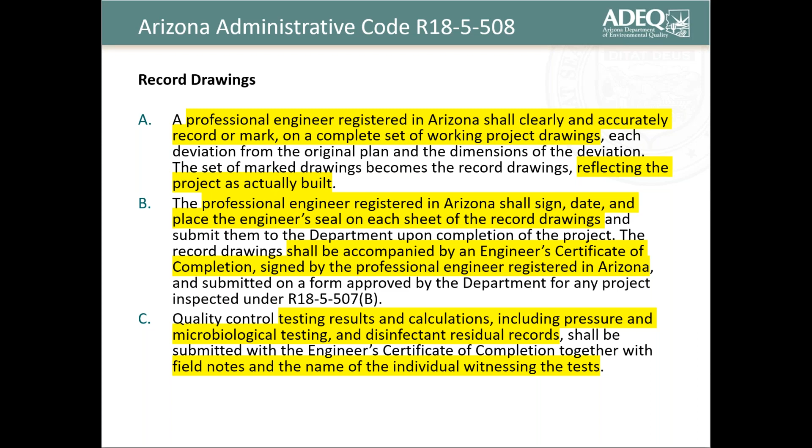In general, most water components will need the following documents: first and foremost, the AOC application completely filled out, the record drawings, the pressure and leakage testing results, the disinfection testing results, the Bac-T, and the operations and maintenance manual, which is more specific to treatment projects.

The AOC application, along with the record drawings, will need to be sealed and signed by the same registered PE in Arizona. There is a section in the AOC application for the pressure, disinfection, and Bac-T tests that can be filled out. We also accept those testing results to be attached to the application as long as it is accurate and signed by the responsible person. The operation and maintenance manual will need to be updated based on the treatment type and operations plans.

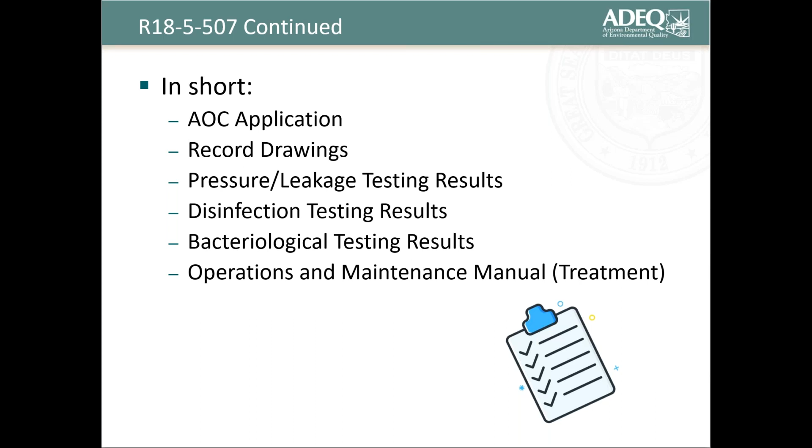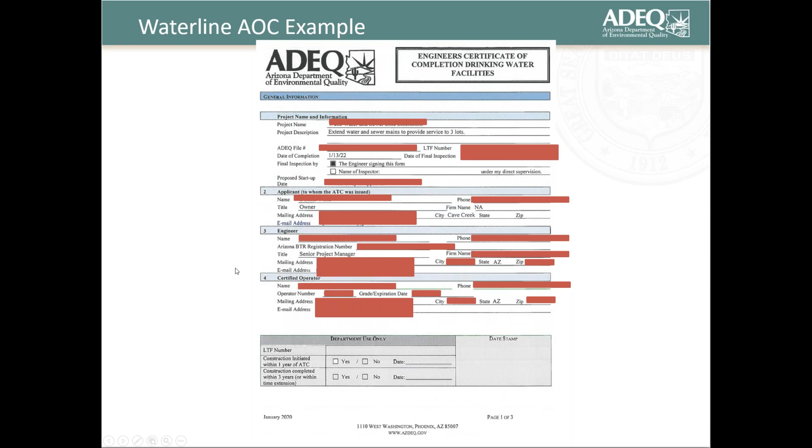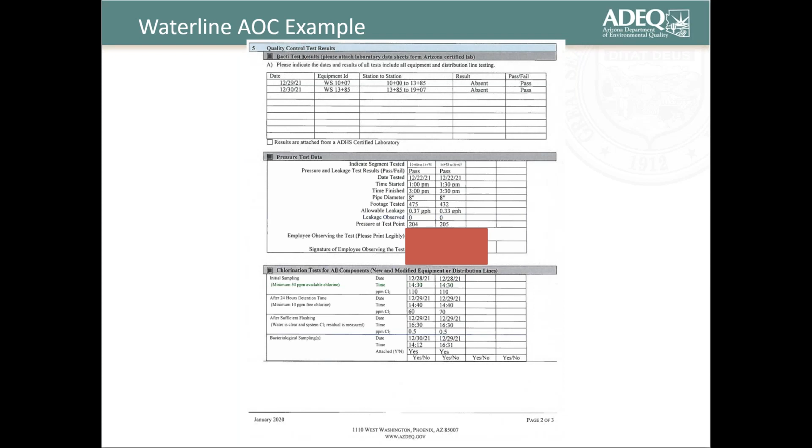So after reviewing these sections, the following pages are where the PE registered in Arizona will sign the AOC application and attach the seal to this document. After review of that AOC application and related documents, the review engineer of ADEQ will issue an AOC permit that certifies the approved water component to be activated and put into use. Depending on the type of component, ADEQ will issue a monitoring plan and make the appropriate updates of the water component installed.

So now let's briefly go over the topics that we discussed today.

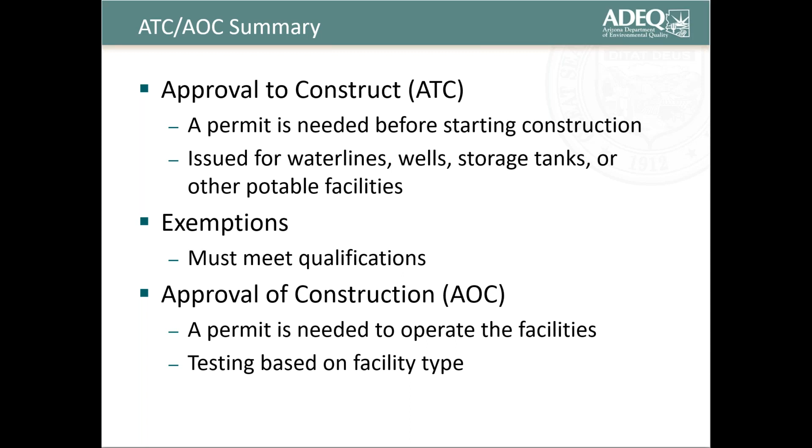We went over the ATC phase and learned the requirements needed to obtain a permit before construction. We went over the different water components that need an ATC permit and the associated items for approval. We took a slight detour into the exemption process and learned about the rules and qualifications to be exempt from plan review. And then we learned about the AOC phase, which certifies the completion of the project that is ready for operation. After proper testing and review of the record drawings or as-built, the AOC permit is issued as a final step in the ATC and AOC process for drinking water facilities.

Here are some helpful resources where you can find the ATC and AOC application at the Engineering Review Unit webpage, as well as other useful information, such as examples for water lines, storage tanks, wells, and booster pumps. Please remember that we are working remotely, and electronic submittals are a priority.